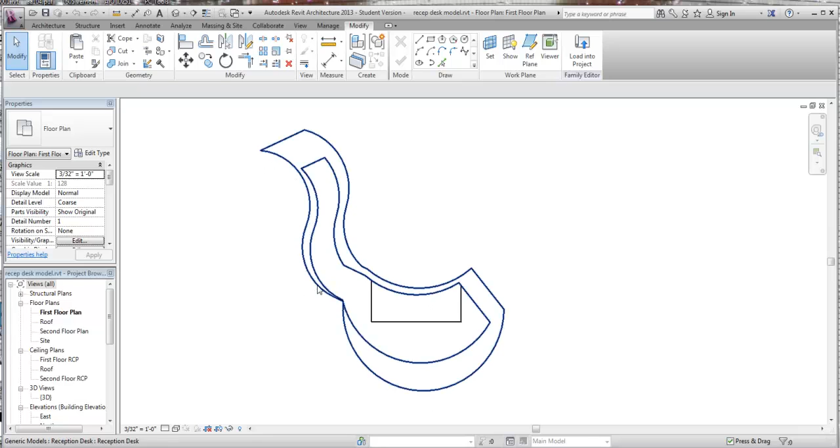And she started creating it. Let me, oh, hold on. Got a few different views open here, so I gotta get through them. There we go. She started creating it here. I like this end that started happening, but then this kind of goes a little funky.

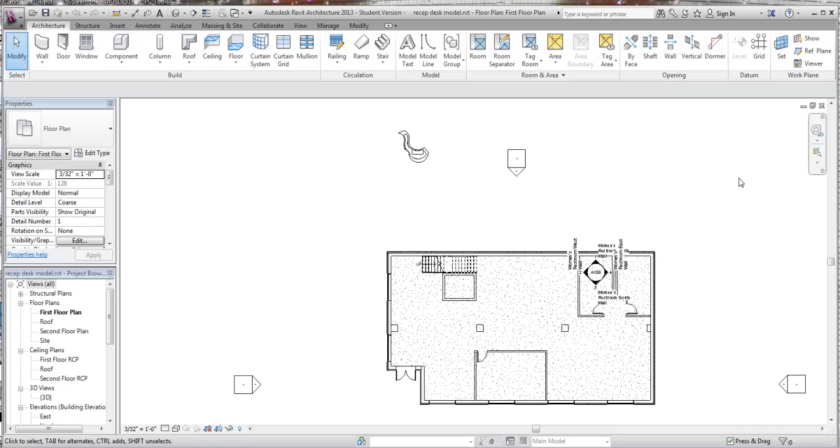And I know that you guys are taught to create this thing starting component and then the whole model in place thing, but if you go to new family, you'll get the same tools and you can build it outside your model and then bring it into your model. So I'm going to come in here. And this is what you wind up getting: it's the same look basically, but all it is is how to create a family instead of working in the project itself.

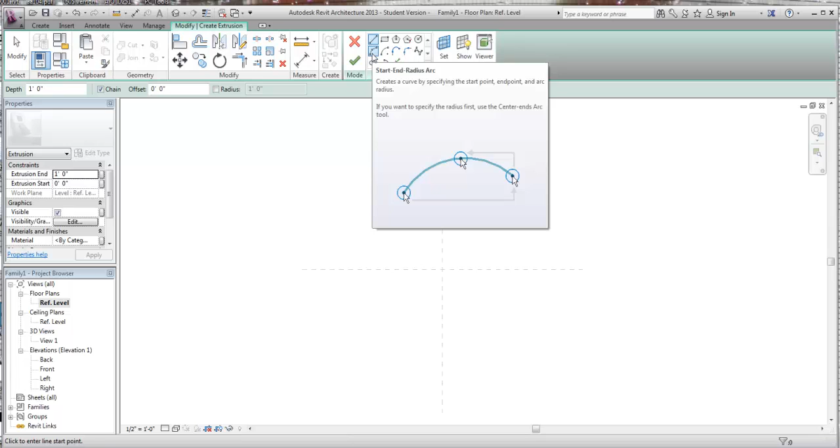So I'm going to do an extrusion, and with that extrusion here, I've got all these tools over here, and this one is a spline, okay, and then we've also got some different arcs. And depending on how you want this thing to look, we're going to deal with either of these. So you can see I can just start creating arcs.

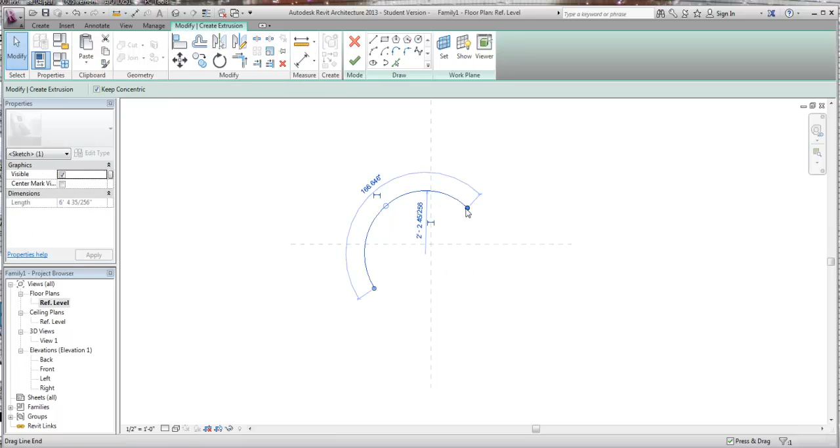And what I want to do here is really come in, I'm going to draw an arc, and I'm going to look at it for a second and say how big is this thing. So I've got 6'4" to there, and she was trying to get somewhere around 6 feet. That would be about a 3-foot radius. Okay, so 3-foot radius. You can see when I get in here, I'm hitting right around 6 feet, and that comes in.

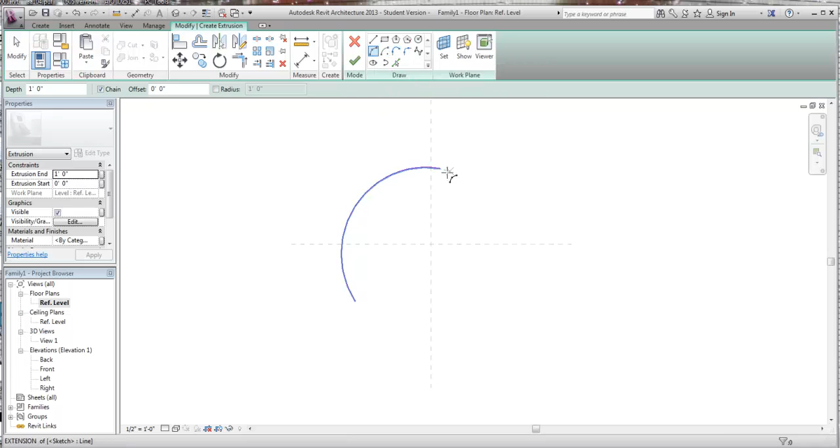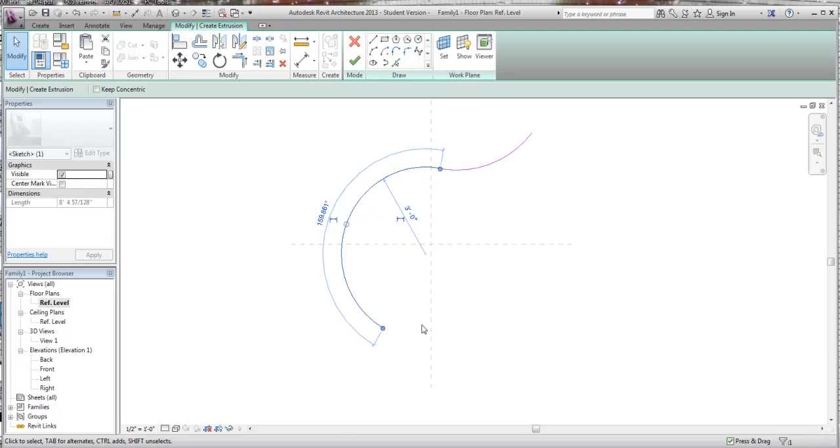And I'm not sure if she was, like if we pull this in a little bit like that. And then if I come in again, start-end-radius, something like this, so we get that nice curve happening. Let me pull up the sketch again. So I think that's what she's kind of going for, something like that. If I grab this one here, I can even pull it a little more closed, something like that. So we get this idea happening.

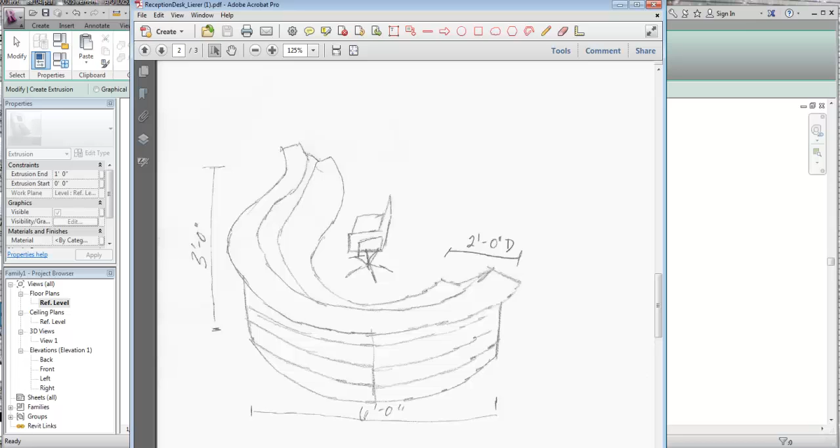And from there I'm going to go offset, and she said 2 foot overall, but it looked like there were 2 heights to this thing. See, there's a top piece, and then she's got 2 foot overall. Now 2 foot I think is a little thin, 24 inches, a little thin. Again, it's your design, but I would think maybe 30 inches might be a little bit better, but I don't know. So let's see.

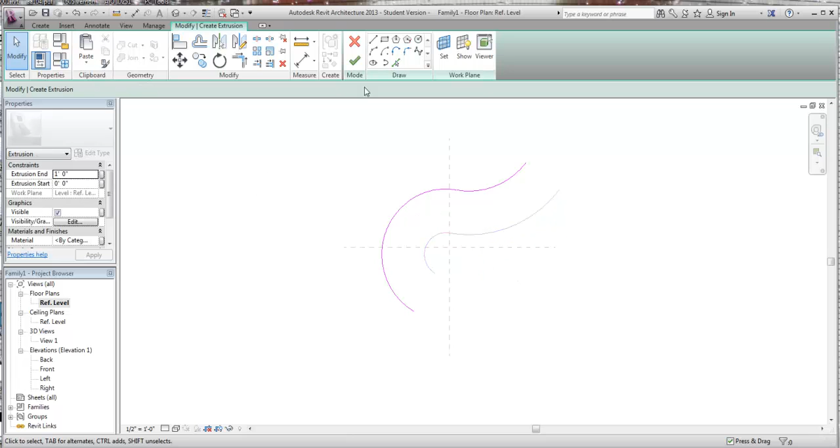So if I do that, you can see now the outside edge to the inside edge. We don't want to do it that way because it's pulling it in, okay? I sometimes get students that are like, well, it doesn't fit now. Let me undo that real quick. So instead, I'm thinking that this is the inside edge, and we're going to go that direction, and that's the outside. So that gives you room to actually sit in here instead of being pulled in. So I'm thinking that the 6 foot is hopefully that inside portion here, okay?

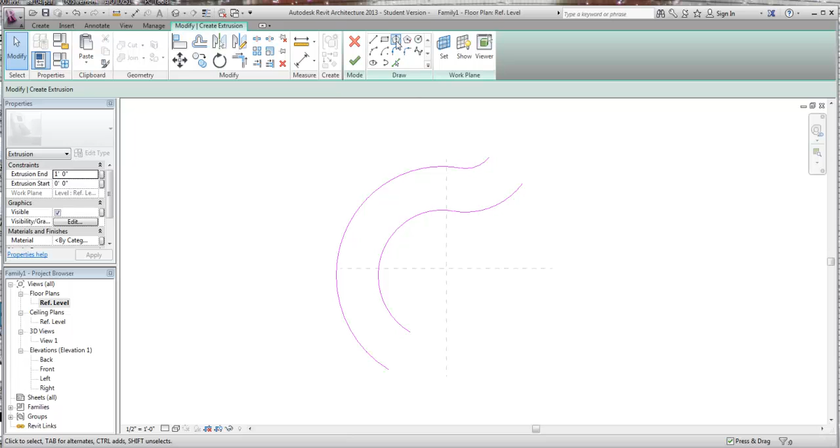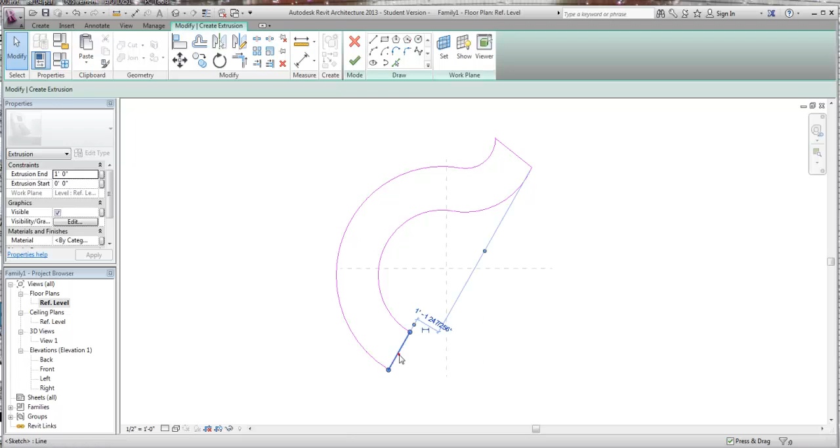And then I'm going to do a line here and a line here, and it looks not too bad, but I think that this should kind of go out a little bit more. So see how this thing will drag it? Look at that. Kind of creates a little bit more of the flare. All right. And then I could do the same with this thing too. I could say, well, let's do that a little bit more. Maybe that's more like it.

And the extrusion start and end, I want a thickness of 1 inch, but she's going 3 foot, so I want this thing to start at 35 inches and stop at 3 foot. Apply, check that one. And if we take a look three-dimensionally, you're starting to see this surface, okay?

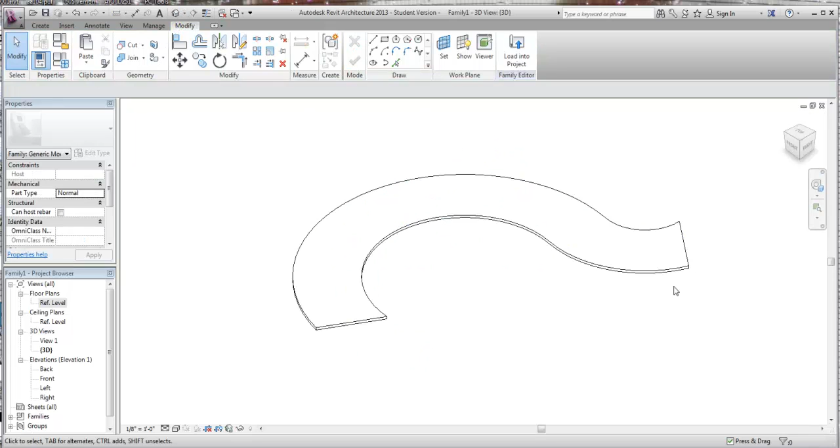So now I go back into this view, and 3 foot's the top. Maybe that's 30 inches. Maybe we have to deal with that at 30. So let's do this at 2'5", and then 2'6". Apply, and it just drops it down. Okay, now with that done, what I'm going to do is come in here, and it looks like there's something that goes on right inside here.

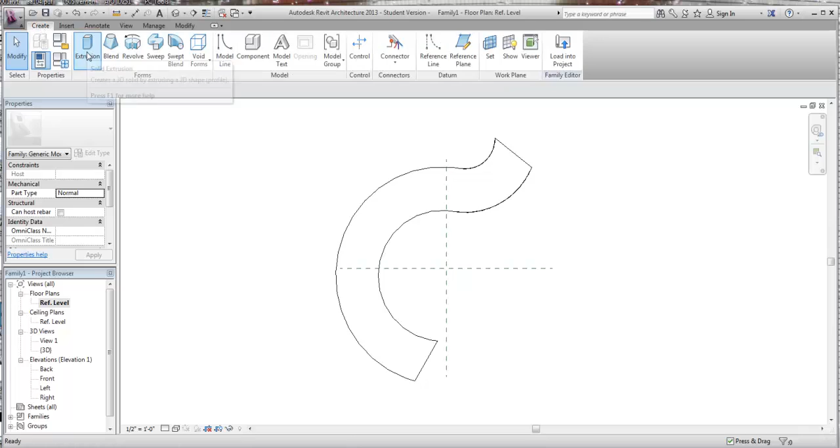Okay, so let's do create extrusion again. I'm going to take this arc that I created and I'm going to snap right to it. Look at that. Okay, and then same thing with this one. Snap right to it. Now this one I am going to offset 6 inches, and I'm not going to copy it because it's going to just pull it in then 6 inches. That's fine. Unjoin those. There we go. We're good. Take this guy, pull it in till it hits there.

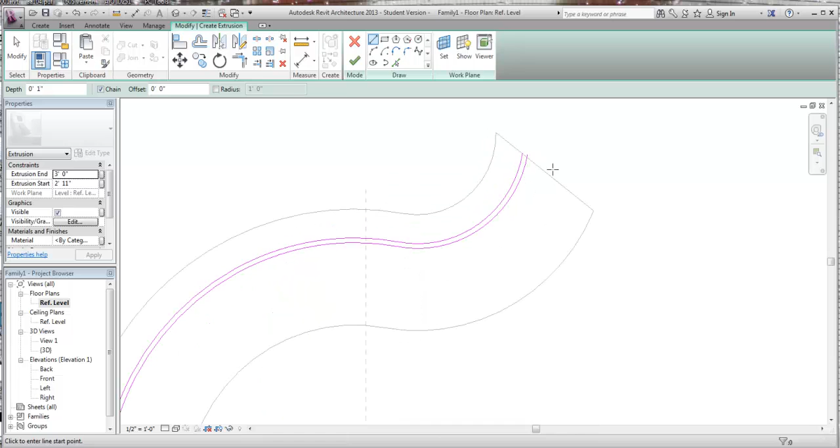That guy goes there. And I'm going to then do another offset of 1 inch. That will be a copy. Bring that in, bring that in. There we go. A couple lines in here, because you have to close these up in order to have an extrusion. And this extrusion is going to start at 4 inches, because I want to somehow create a little toe kick behind that, and it should end at 3 feet, I think. We'll go all the way up through, and then you can put a top one on.

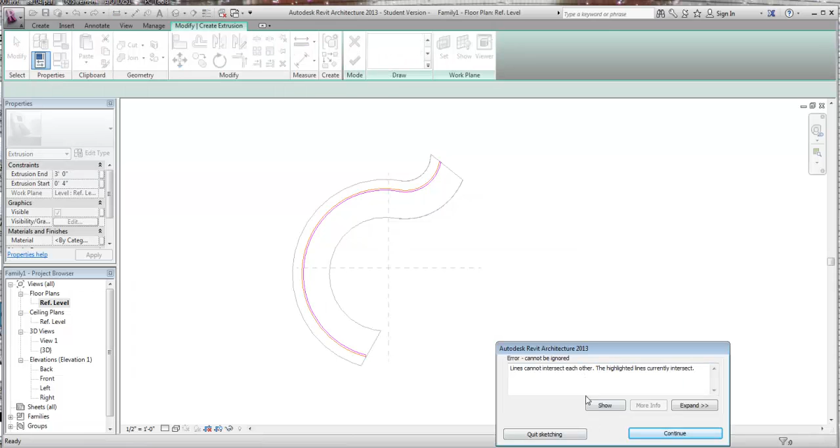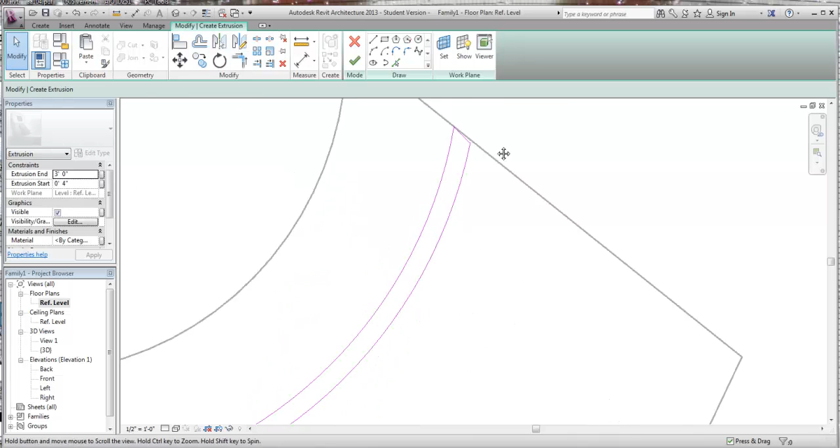And so lines intersect. Where's my lines intersect? There we go. Continue. Okay, so you have to make sure all your lines are meeting up perfectly. Whenever you get that, just take that little guy. Let's see if that's doing it. And then I'll do it with this one here too. So I'm going to grab this and that. There we go. That and that. Okay, that's more like it. Now I got a 3D element. And again, jump it up. See how it's starting to become that desk?

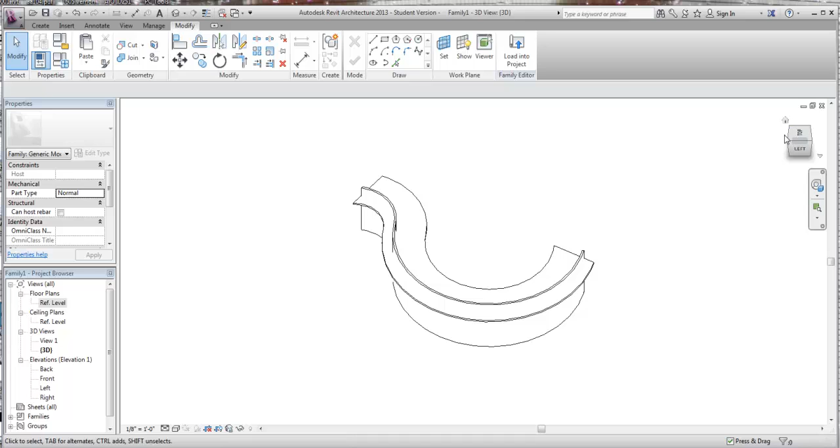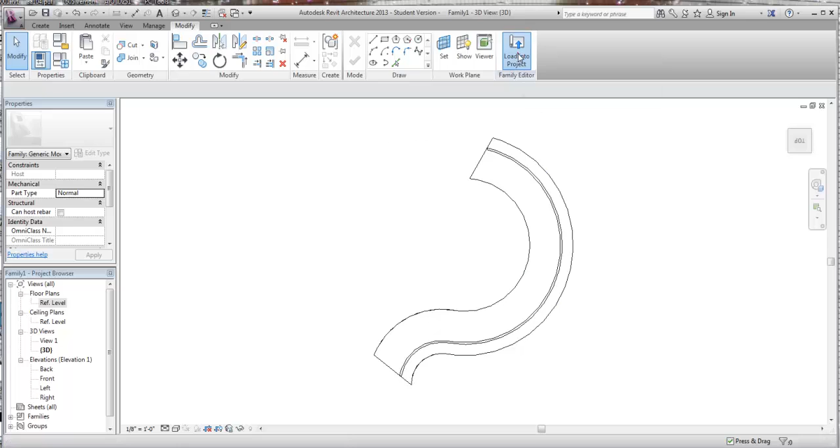Alright, so then I take and do a smaller one up on top to set that one up. I then come inside and start building the interior portions of this thing. But there's the base idea of that shape, and see, it looks pretty good, right? So that's the idea. Then when you're done, you hit load into project, and it will actually let you bring it into the project and set it down. Alright?